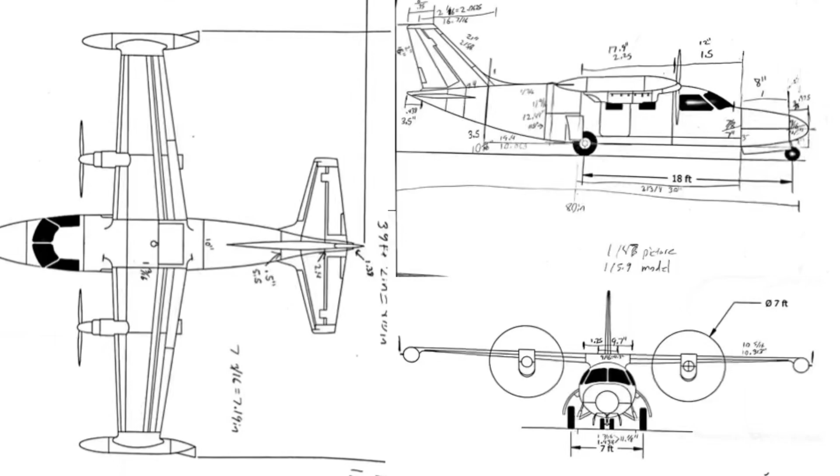Just a side note before we get started, each one of our drawings was a different scale, of course. So, we're just going to stick to this one drawing here. That way, you can get the basic idea.

Circled in the corner is the scales. The top number is the actual scale of the RC airplane, and the lower number is the scale of the drawing. Now, how do we come up with those numbers?

First, we must measure the wingspan of the drawing, which was 7 3/16 of an inch, and then we'll convert that to decimal, which was 7.19 inches. Next, we'll take the wingspan of the real airplane, which was 39 feet 2 inches, and convert it into inches, which ends up being 470 inches.

Now we'll take the wingspan of the real airplane and divide it by the wingspan of the drawing, and we'll end up with 65.37, and that will be our scale for the drawing.

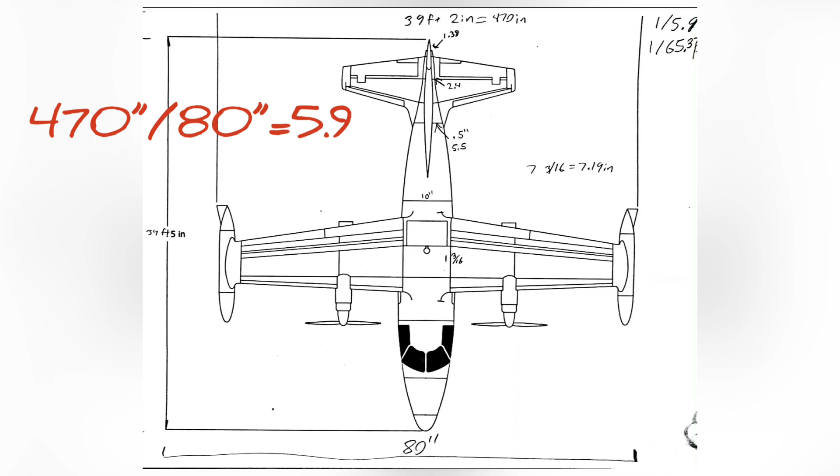To figure out the scale of the RC airplane, we simply take the real airplane's 470-inch wingspan and divide it by 80 inches, which gives us 5.9, and that'll be the scale of the RC plane.

Let's do an example so we can demonstrate how to use these numbers. Let's take this cross-section right here. It measures 0.5 inches. We will take that 0.5 inches and multiply it by 65.37, and that will give us how big that cross-section is on the real airplane.

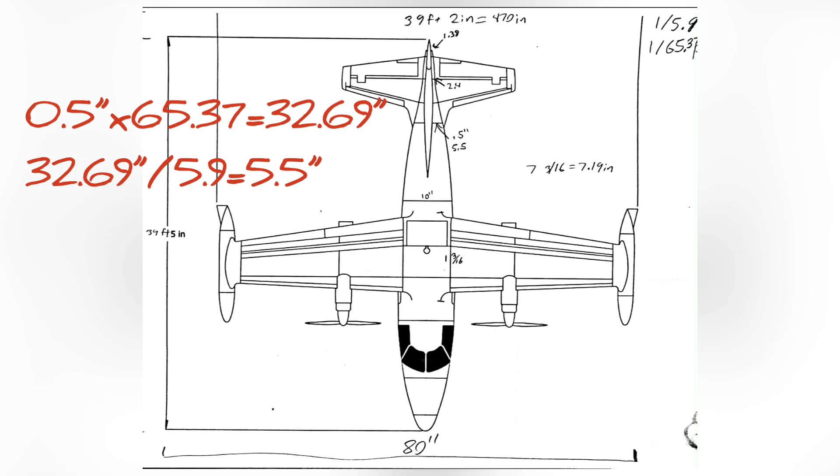Now that we know that the cross-section is 32.69 inches, we will divide that by the scale of our RC airplane, which is 5.9, and we'll get the answer of 5.5 inches.

Next, you'll take the side view of the airplane and run that same equation. Now that you've figured out how tall the piece was going to need to be, you slap those two measurements together and you come out with an oval. At least that's what I did.

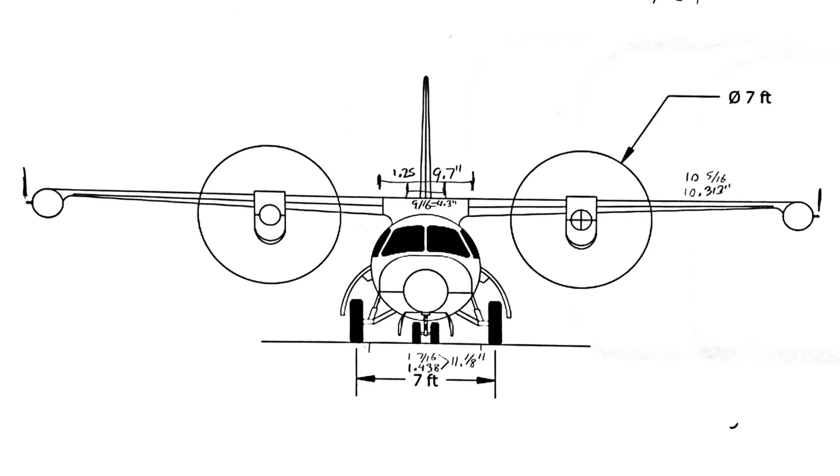Now let's move on to materials.

Because our construction method is very similar to the Flite Test guys, of course we got to bust out that hot glue gun. We're also going to be using pink insulation foam for the more molded shapes, and also Gorilla Glue and wood on the things that just need a little more strength.

We ended up using Office Depot foam board. Yeah, it's a little more expensive than the Dollar Tree stuff, but I really did need some big pieces, so this 40 by 60 actually worked really well. Now let's take all of those equation answers and start drawing. As you can see, an 80-inch airplane doesn't exactly fit on a 60-inch piece of foam board.

We started off by cutting out the side profile. Then, in 2 halves, we cut out the top profile, and glued them on to either side of the side profile. Now, because the airplane was 80 inches long and the board was only 60, we made sure to overlap the top profile pieces on either side for overall strength.

Now it's time to start cutting out rib pieces. As you can see, I used a really unconventional compass. The larger cake pan was used for the outer diameter of the rib, and the smaller cake pan was for the inner diameter, or the inside hole. And then we would take those and simply hot glue them to the fuselage. And boy, this airplane was really starting to take shape.

Then we hit our first engineering snag, the landing gear. We used some repurposed landing gear. The mains are from the Freewing 90mm F-16, and the nose gear is from the Freewing 90mm T-45. Now I say engineering snag because it did take us a few days to figure out how to reinforce these ribs so they can handle some of my, well, bad landings.

Now on to our next engineering conundrum, the wing box. This was a particularly tough one because the MU-2 doesn't have a lot of surface area that the wings mount to. So that was a particular challenge, just to make sure it was beefed up really well. After the clamps and the soup cans were put away, it seemed like we came out with a pretty sturdy wing box. That wasn't it for my soup can buddies.

It was time to start building the horizontal stab. Now, let's go take you back to the shop as we attach the horizontal stabilizer to the airplane.

All right, guys, so now that y'all are all cut up, as we said, we were going to leave off on the horizontal stab. Now, I've since finished it off since the last picture. We went ahead and just like on the vertical stab, we took the paper off of the foam board and we just left this foam to be exposed. Now, y'all are probably wondering how we're going to cover this whole thing, and we plan on actually fiberglassing it. It's gonna look great, don't y'all think? Yeah! I love the enthusiasm, girls.

But as you can see, we got our carry-through spar here. We have some carbon fiber reinforcement on the back side, so it's nice and rigid. It shouldn't give us any issues. Yeah, it's pretty rigid. Also, what we didn't have in the video is over here, as you can see, we got our mounting. We made like a little frame to mount the horizontal stab on, so it should be plenty strong.